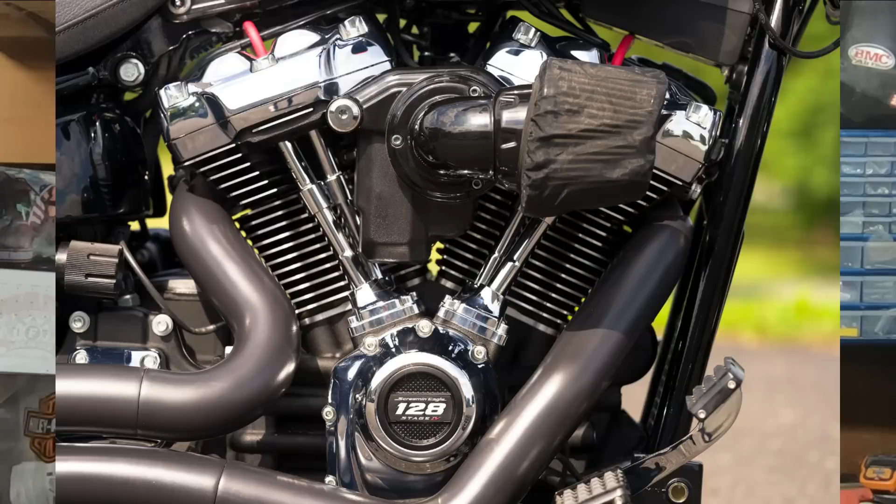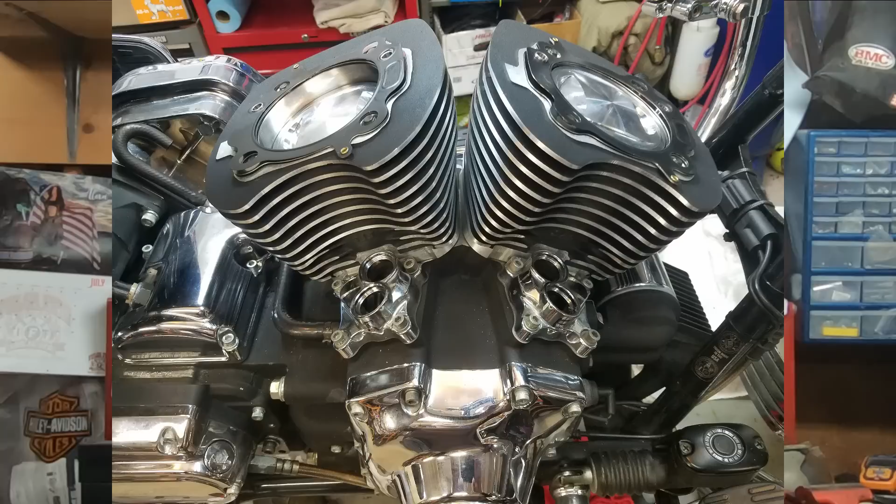Large displacement engines really do have a lot of good points to them. One being they produce a hell of a lot of torque, which is awesome, and that's pretty much why you buy a Harley, is you want all that torque. Now going with very large displacement engines, this also gets extremely expensive in the fact that you're going to generate a lot of heat, you got to get that heat out of the engine, and then on the flip side of that, you're also going to need a lot of machining and a lot of supporting parts to actually deal with that amount of torque that that big engine's going to produce, which pretty much makes your cost go sky high. Not everybody wants some huge monster engine.

We want something that's reliable, that also produces excellent horsepower and torque, and not only that, it's not going to break down on you all the time, and you're not going to have to do a bunch of extra maintenance to it. So guys, let's take a look at some engine setups that aren't going to break the bank, they're not going to break your wallet trying to maintain them, but these setups are still going to get you in that range, kind of that golden range of horsepower and torque when it comes to a Harley-Davidson motorcycle.

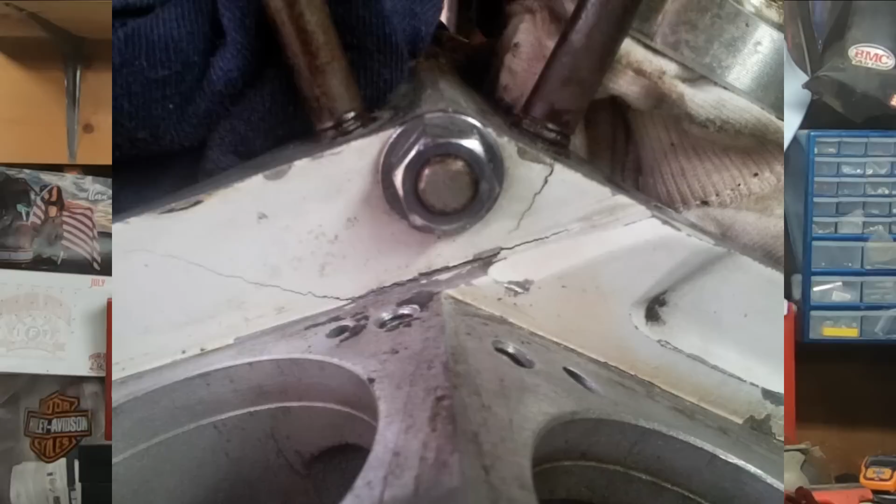You're really pushing it on a set of stock cases when you're getting up to about 90 horsepower on one of those, and an Evo can muster close to 100 foot-pounds of torque, but once again, stock cases, take it easy. Now if you're running the Milwaukee 8, doesn't matter if you have a 107 or a 114, you're already right in that sweet spot without having to do anything.

And of course, just the stage 1 setup and maybe a mild cam, that'll put you right up there where you want to be. And that doesn't matter even if you have the 107 or the 114.

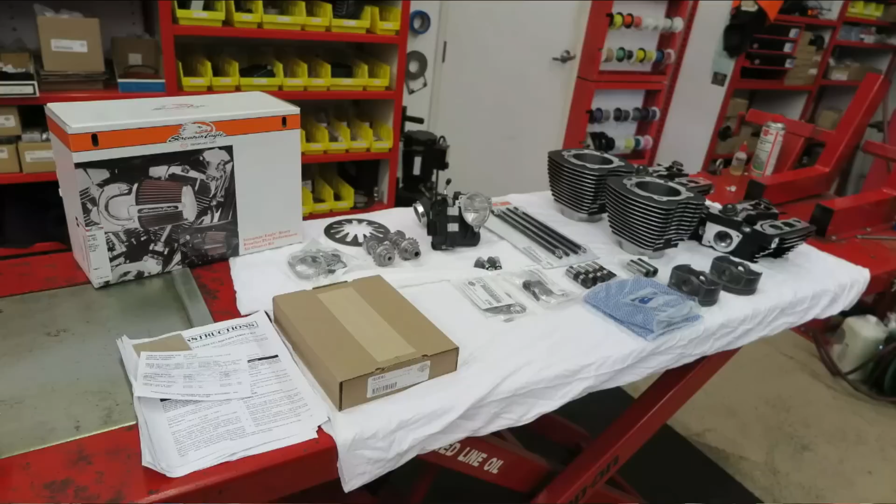Now with twin cam engines on the 96 and the 103, you can bolt on a 110 kit to either one of those motors. But if you're running the 88, S&S does allow you to get up to a 100-inch motor, or you can bore your stock cylinders out to 98 inches. So 98 to 100 inches, that's about the best you could do on a twin cam 88, unless you're willing to actually split the cases and put a bigger crank in it. Once you do that, you can pretty much do whatever you want.

So with the Milwaukee 8 having this 131 now, everybody really just started to think, man, I gotta go bigger. 131's where it's at, no matter if you got a twin cam or a Milwaukee 8, you're all shooting for that 131 cubic inches. Now while the 131 cubic inch is just absolutely killer for torque, you might be surprised that the larger displacement really doesn't do a whole lot in the horsepower department.

So guys, to kind of get an idea, let's take a look at basically an otherwise stock 103 twin cam that's just got a cam swap in it, and then an otherwise stock 107 - well it's not really stock, it's a 103 that's got a bolt-on 107 with the cam in it. But let's go ahead and take a look at these two engines, these two similar setups, and kind of get an idea of what the horsepower and torque difference can actually be with a little bit larger bore.

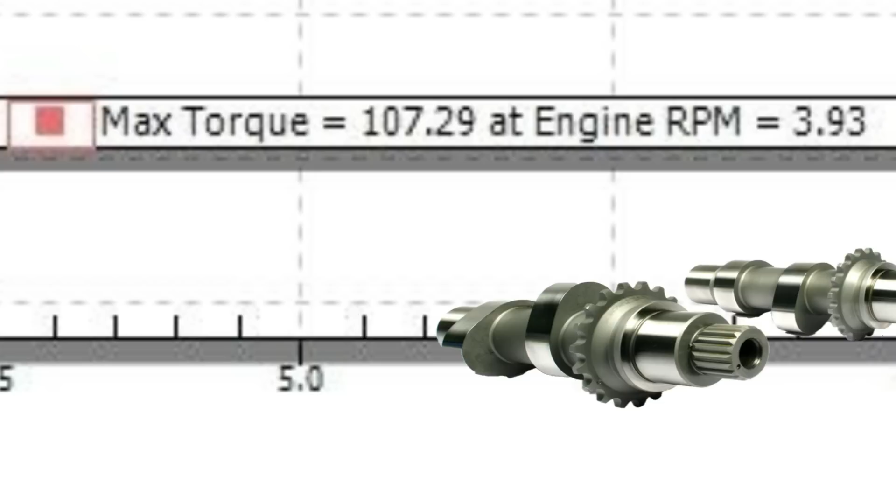So here we have a 103 twin cam with a Fueling 574 cam. This is coming in at 97 horsepower and 107 foot-pounds of torque. Very, very respectable, and for sure nothing to complain about. And honestly, the Butt Dyno would be very, very pleased with these numbers out on the street.

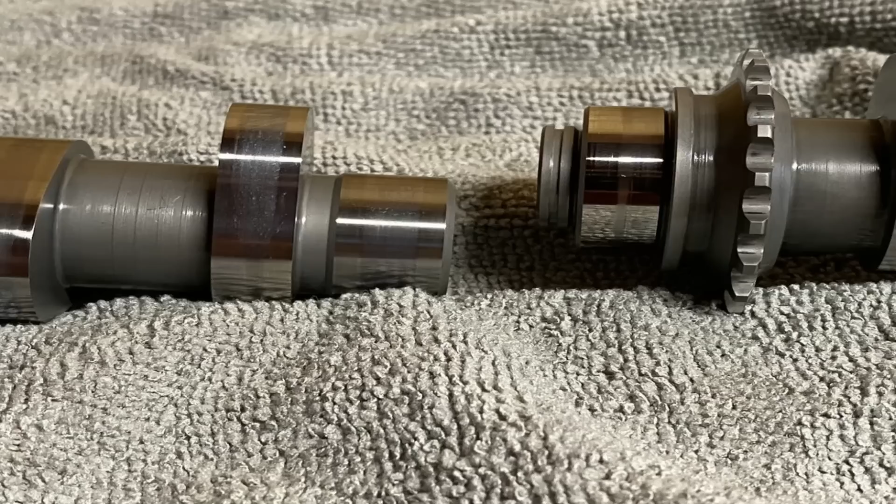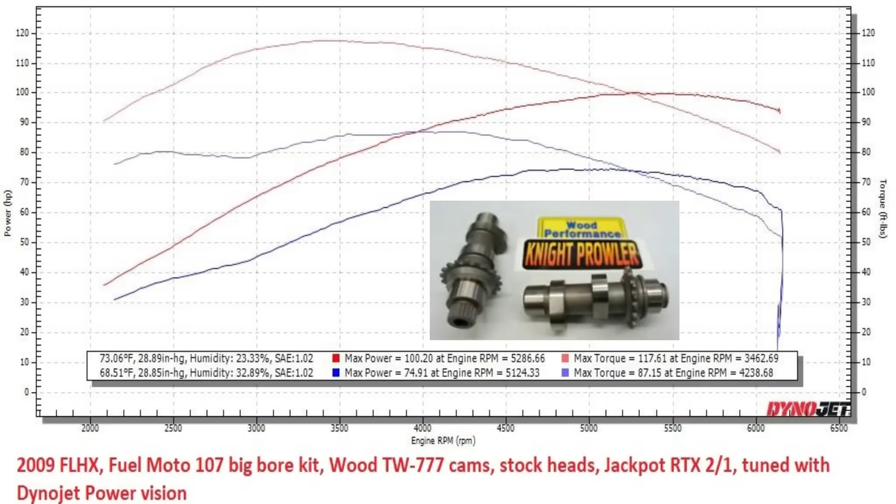Now let's take a look at another 103 twin cam that's been converted to a 107 with a comparable exhaust, except this bike actually has a Wood TW777 cam. Now remember I mentioned horsepower would be pretty close, which is 100 horsepower compared to the 97 on the 103 with the cam. Now in all fairness, the TW777, this is a very high torque cam, and honestly a majority of that lot of torque is going to come from that cam.

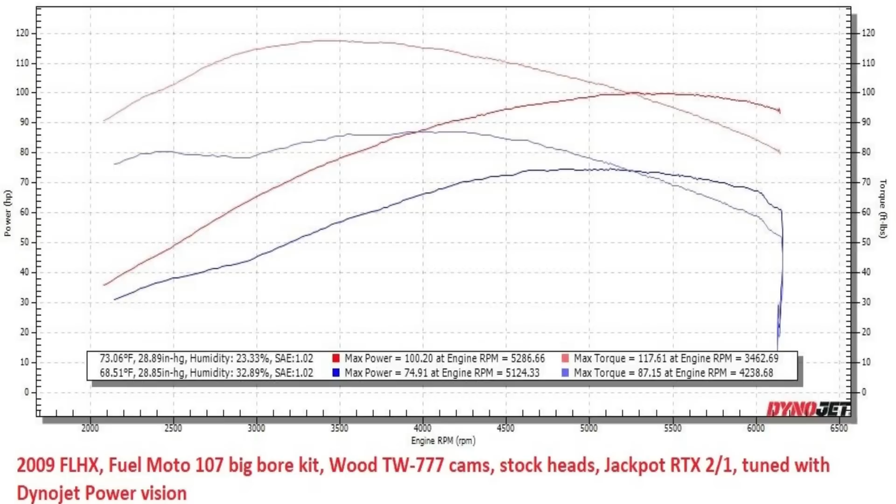And by the difference in torque, we're talking 117 foot-pounds of torque compared to 107 on the 103. This is due to a little bit of the added displacement. So even at 107 cubic inches, we're still hitting that golden range of horsepower, just over 100 horsepower, but we're also hitting a highly desirable 117 foot-pounds of torque.

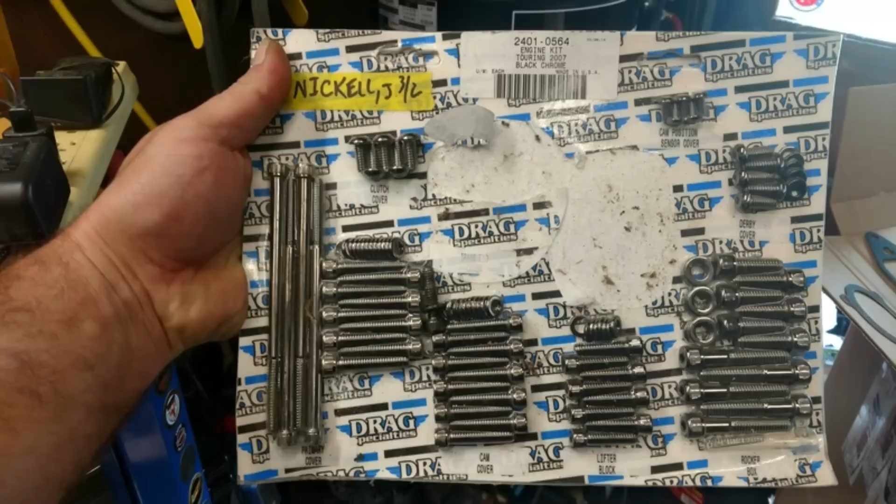Guys, that is really hard numbers to beat. And we're talking a simple bolt-on setup. We're not going too crazy with boring the cases, putting these monster cylinders on it. We're keeping it basically a stock compression ratio, just a little bit larger bore and a cam. Not a whole lot of difference between the 103 and 107 displacement, except for about 10 foot-pounds of torque, and honestly a lot of that we could attribute to the Wood cam.

So far we're not seeing a huge performance increase when it comes to just displacement alone with a decent cam. Well, let's take a look at an engine that's got a little bit more performance goodies in it, and let's see how it compares to a very mild-mannered 107 and 103 that are basically stock compression and otherwise nothing more than a bore increase and a cam.

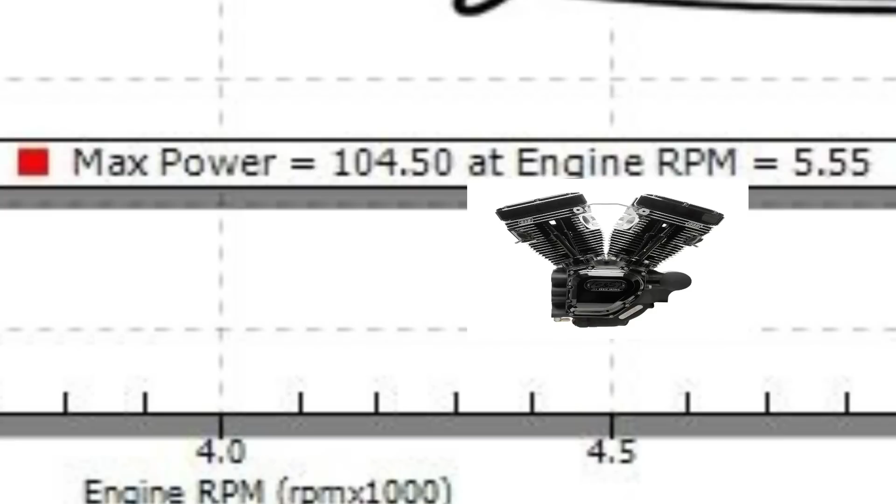Kind of surprising here, we have an S&S T111 crate engine putting down 104 horsepower and right at 111 foot-pounds of torque. Not exactly the kind of numbers I would have expected here either. So that just goes to show that even with compression, a bore increase, and a bigger cam in it, your money is really not going all that much further with these larger bore increases.

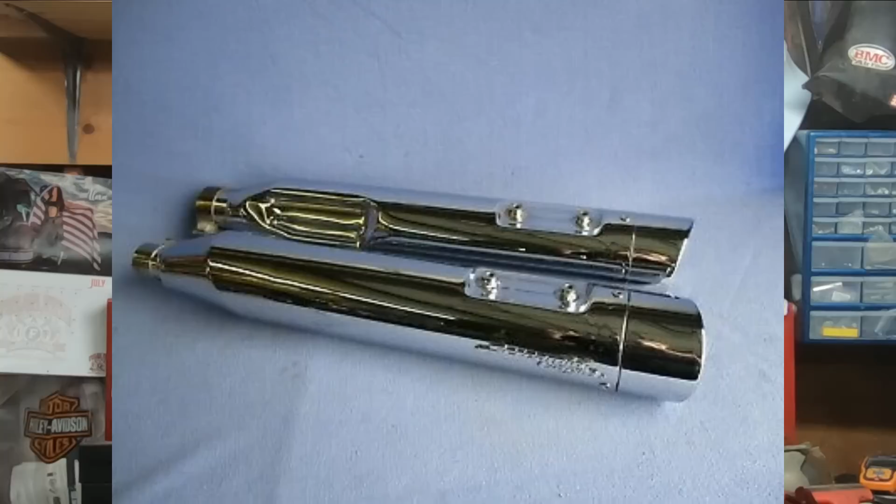But to be fair, I would say those numbers were a bit soft, given that this bike was actually run with Screamin Eagle mufflers. But even with the Screamin Eagle mufflers, I would have really expected to see the torque a lot higher than that. I was honestly surprised that the 107 put more torque down than the S&S engine.

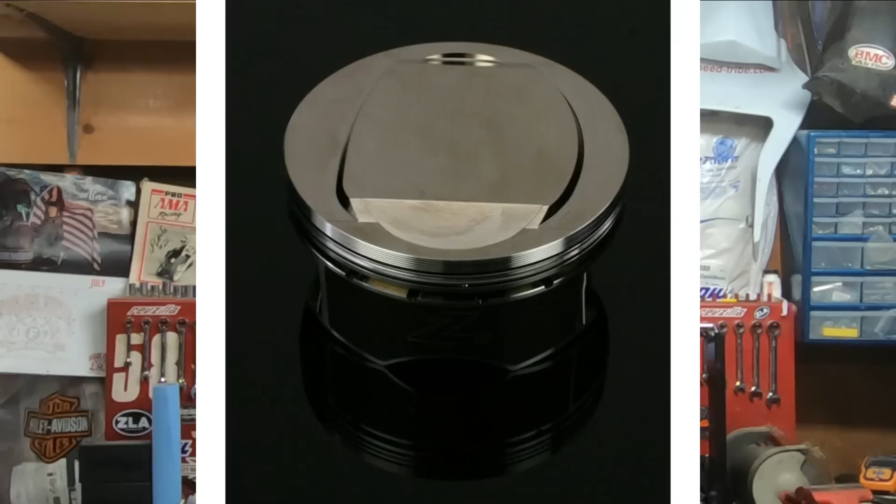But at the same time, the S&S engine has an S&S cam, and if you remember the 107 I showed you had a Wood TW777 cam, which is a monster high torque cam. Keep in mind, none of these engines, other than the S&S, really had compression over stock. They had a little bit of a bore increase on the 107, but we're talking a stock 103 that had basically just the Fueling 574 cam in it and nothing else.

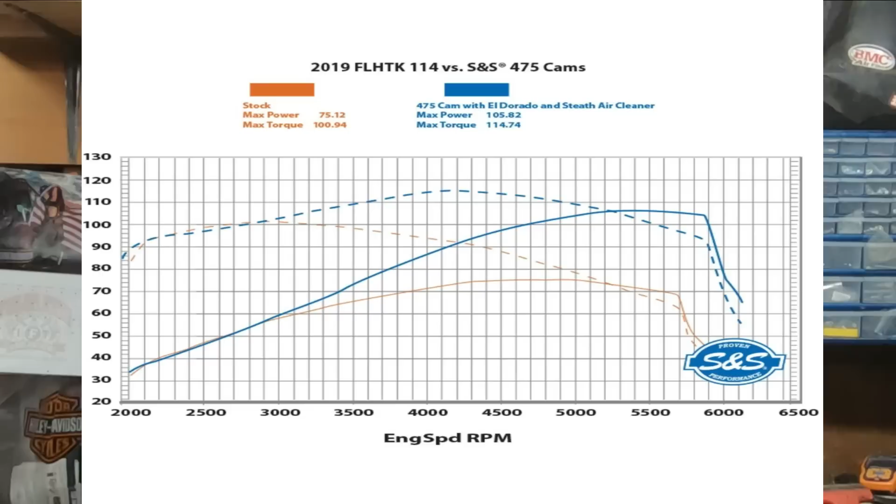Well, of course, exhaust system and a tune. But as you can see, these huge bore increases really don't do a whole lot for you. If you got a 103 or bigger, yeah, you can just put a cam in it and you're good to go. If you have a 107 or a 114 Milwaukee 8, a cam's really all you need.

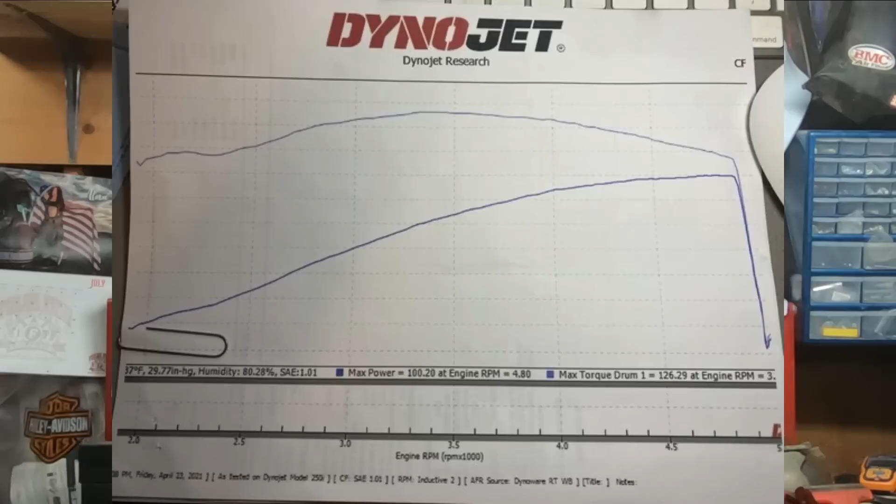You don't really have to go crazy with these huge bore increases. You start getting these large bore increases, sure, you're going to gain a little bit more torque, but at what cost? How much money are you going to put into that? If you got the money, great, but not all of us got that kind of money to sink into it. And if you're going to sink that kind of money into a big bore increase, you'd better be doing the right things with the supporting parts. It's not really cheap insurance, but it's good insurance, so you don't blow it up and end up with a big smoldering pile of wasted money.

So guys, if you're looking to have some work done to your bike, don't let somebody talk you into some 120 cubic inch kit when you could really accomplish your goals with basically a 103, maybe 107 or 110, and just a good cam. You can save yourself a lot of money this way. Because guys, at a certain point, bore sizes just become bragging rights.

You're going to be getting plenty of horsepower and torque out of just the right cam and maybe a little compression or head work. So my honest opinion, we could do a lot with the smaller displacements and just the right cam. And if you want to take it further, throw in some head work and maybe a little compression.